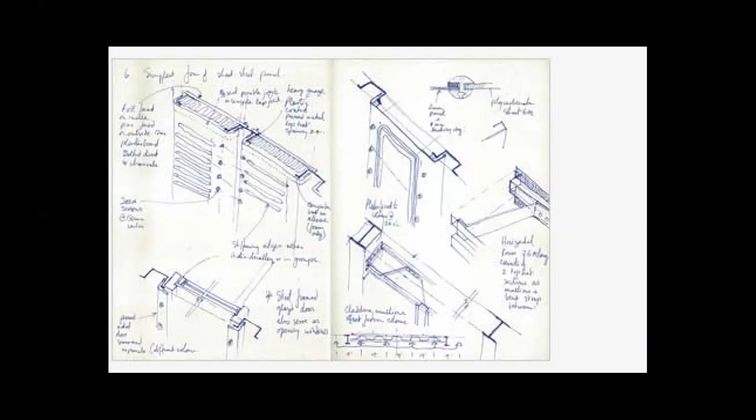Drawings, I always begin with drawings after showing some pictures of the architect. A very minute architect, studying, you see here, details of how the building is built. And this is rather unusual because we see here technical details, drawn in a very sensitive way, I would say.

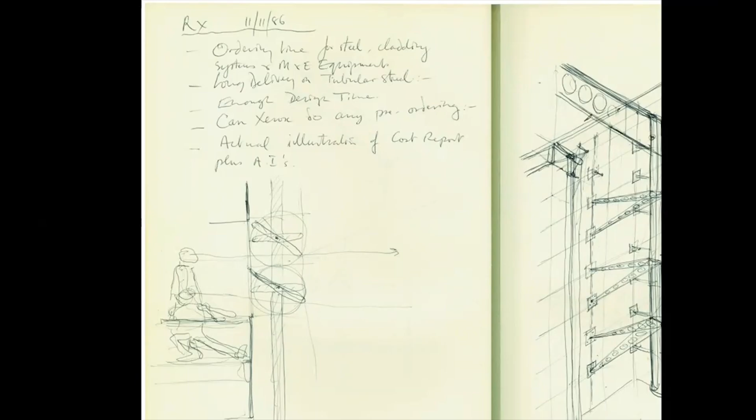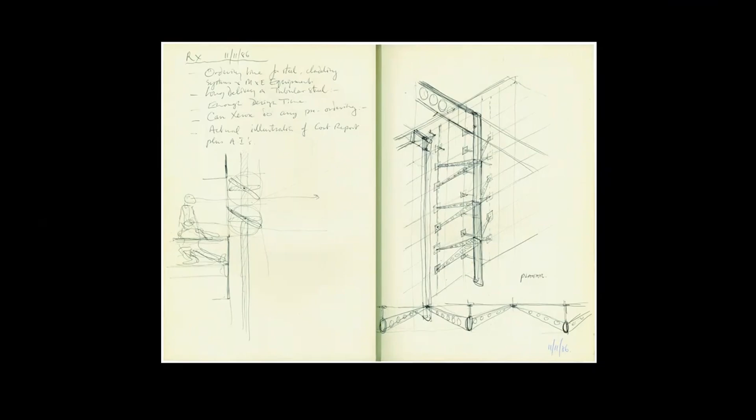So he is an important architect. And I'm surprised that at 80, he gave up his position as the leader and founder of Nicholas Grimshaw and Partners. Anyway, these are his notebooks with studies for the buildings he built. Still drawing manually and drawing very well. Not too many architects of his stature draw something like this, details of this sort. But he did, and I'm glad he did.

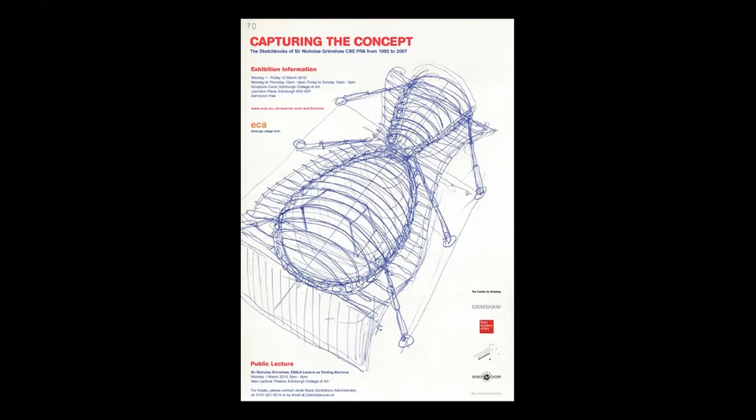Capturing the concept, the sketchbooks of Sir Nicholas Grimshaw. So he was knighted, he received the honor of being called Sir Nicholas Grimshaw, and this is based on his successes as an architect.

Buildings. Okay, so we begin with the BMW headquarters in Bracknell, 1980. But something happened to it. I don't know why I didn't include pictures with this. Maybe I'm a little bit confused. From 1980, there is a reason why I don't have pictures. I made this presentation two years ago.

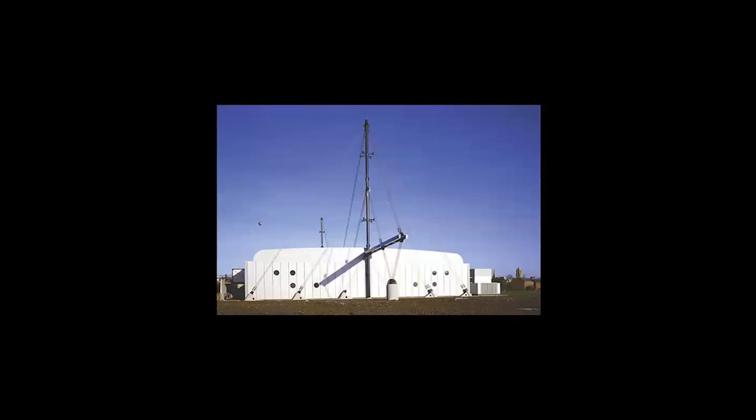We go to the next building, Oxford Ice Rink, from 1984. And look at the elegance of the structure. It's truly very elegant. It's high tech, but somehow the aesthetics are not at all uninteresting. It's like a ship in a way. Technology, if it is used creatively, can also be aesthetically very pleasant, as in this case.

A fine building, which essentially is interesting aesthetically exactly because of the structure. An ice skating rink, you know, you would say what's so special about it, but not too many ice rinks look like this.

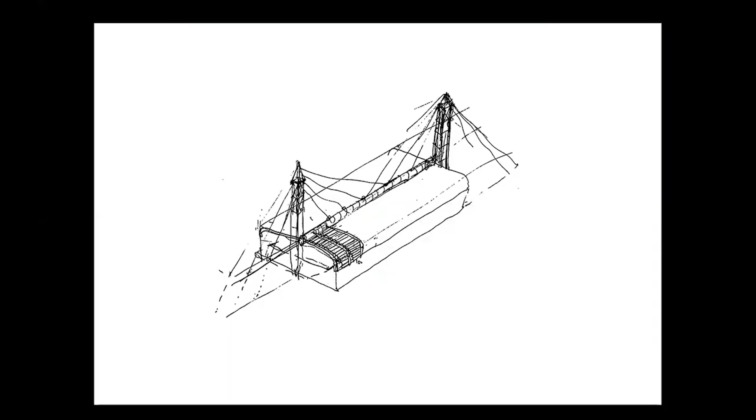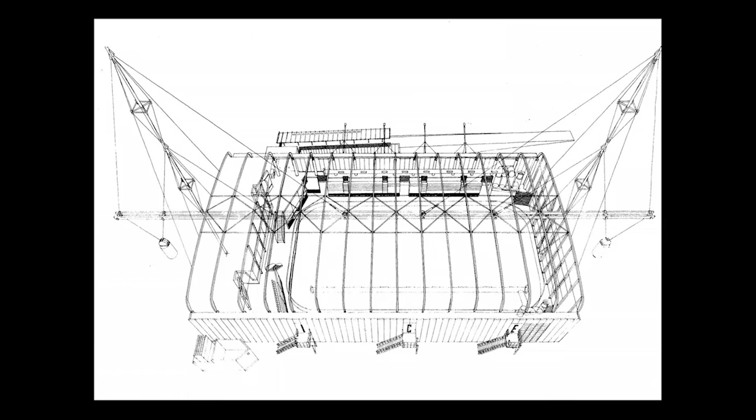His sketch for the building. It is high tech, but somehow I feel it's also very sensitive. And it's because he took the structure, the supporting or the suspending structure, outside of the building. And this creates all of a sudden a visual interest towards the building, facilitating that interest.

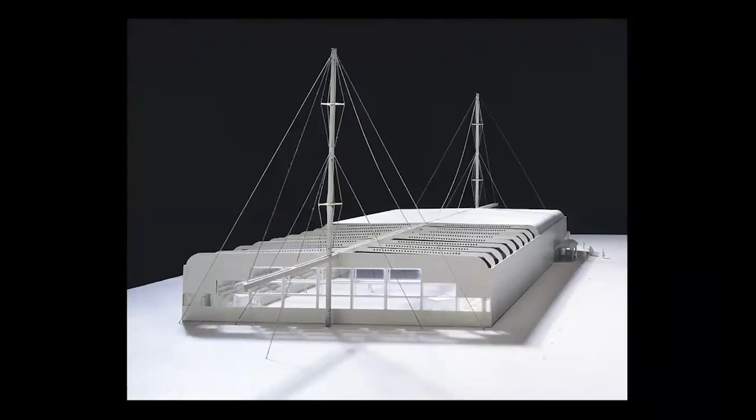Nicholas Grimshaw, the model. Look at the elegance of the structure. It's truly very elegant, and no one can deny its almost artistic beauty. And it's so coherent, and at the same time engaging, interesting. I'm not an engineer, but I feel there is logic here and coherence, and also from an aesthetical point of view, elegance.

Given an isolated site and the challenge of providing a facility for both socializing and sports, the Oxford Ice Rink combines an inspired structural response: two 30-meter tall masts that announce themselves to the historic city center, from where the masts can be glimpsed. With a relatively small budget and difficult ground conditions, as well as the need for a large column-free space for the rink, Grimshaw chose to design a building that could be suspended, thereby reducing the need for piling.

And alleviating the load of the wide span roof. A spine beam formed from two rectangular box sections runs the entire 72 meters length of the building and is supported by the striking pair of masts, which make reference to Oxford's famous spires. The expansive 56 by 26 meter rink is encased by a cladding system that is equally tailored to the building's function. Two-thirds of the rink is clad in cold store panels, with the remaining north facade being fully glazed.

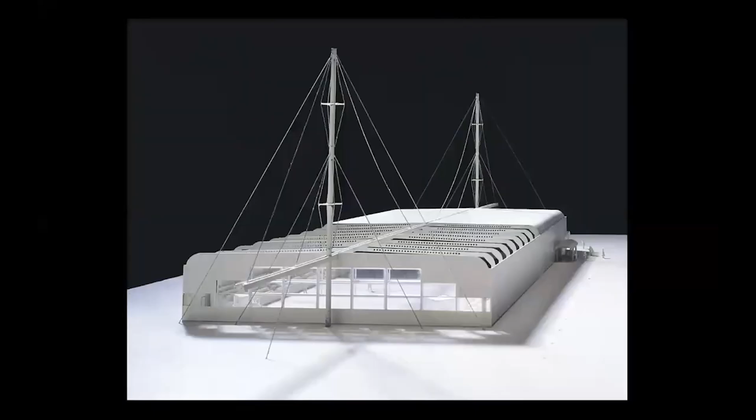Let's go back, because indeed it is very important. You know, the mast is this, and the reference to the Oxford spires, you know, medieval looking. I think it's a very creative way to connect the past with the present. So in this sense, his building is very, very enlightening and enticing. You don't have to mimic the old buildings. You can create something new in the present that still connects somehow with that past.

It's a good building. Okay, now we go to the Clifton Hill Sports Center in Exeter, 1984. Again, I don't have pictures. I don't know what's going on. Financial Times Printworks in London, 1988.

One of the primary environmental strengths of the Eden project is to consider what it replaces. Previously, the site was a China clay pit and was still being excavated during the design phase. The strategy of replacing an almost uninhabitable clay pit with a new natural habitat is perhaps in principle the biggest environmental success of the Eden project. Situated on a 15 hectare landscape, it is an example of successful placemaking.

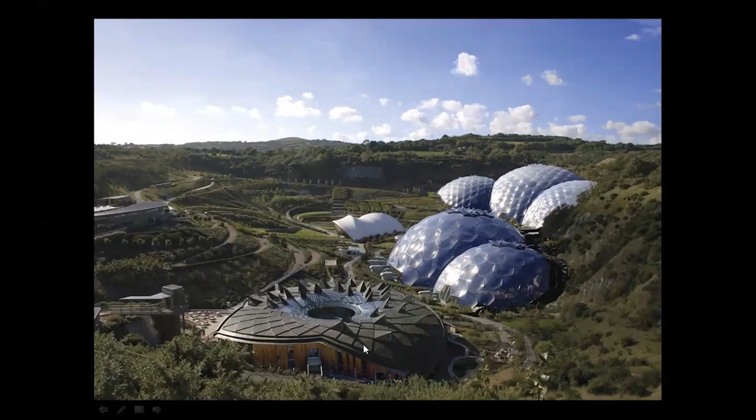Nicholas Grimshaw. So he designed all these buildings, this one included, although it's so very different from the others. He also did the whole master plan. So the whole thing here is done by him and his firm.

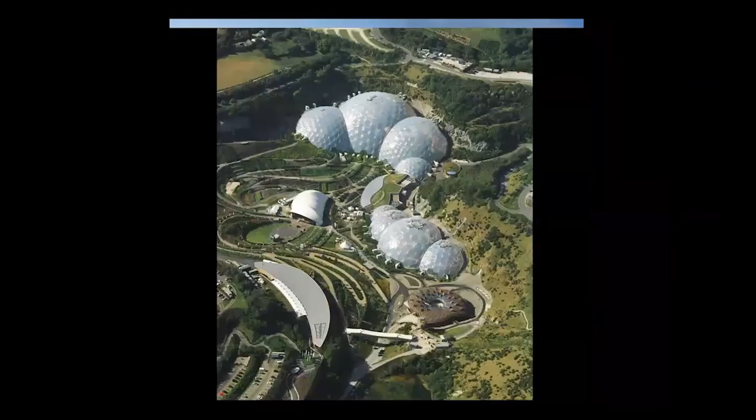In its original iteration, Eden was - you know, the story of Eden is about paradise. Now, if we can create paradise on earth or not, well, it's not so easy, as we know, but anyway, it's called like this - it was proposed as a single interconnected structure situated around the edge of the clay pit.

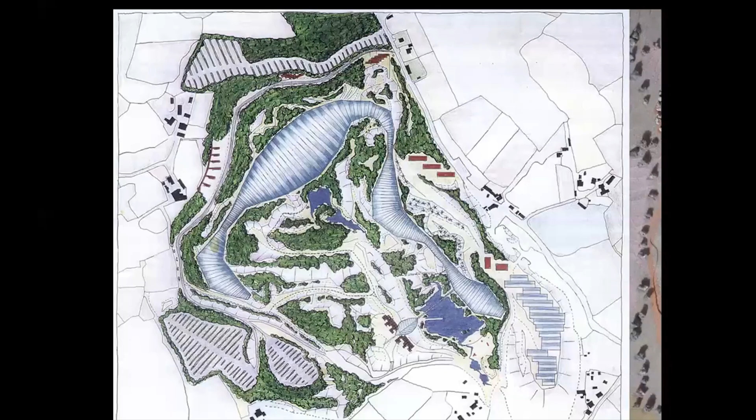This was an initial project, and very interesting, I think, because it's a bioarchitecture in a way. So today the entire site has been transformed from its original brownfield status into an extremely verdant collection of flowers, plants, and fruits, unparalleled in the United Kingdom. The landscaping extends well beyond the greenhouse biomes, making the entire site a lush garden in its own right.

Again, other pictures now from the same project. Designing the biomes was an exercise in efficiency, both of space and material. Structurally, each dome is a hex-tri-hex space frame reliant on 2 layers. The efficiency of the frame relies on the components of the geometric shapes - steel tubes and joints that are light, relatively small, and easily transportable.

The cladding panels are triple-layered pillows of high-performance ETFE foil - I don't know what it is - and environmentally efficient with maximum surface area and minimum perimeter detailing. The biomes received almost 2 million visitors in their first year of opening, and the project is now one of the top 3 charging attractions in the United Kingdom and the second most visited destination outside London.

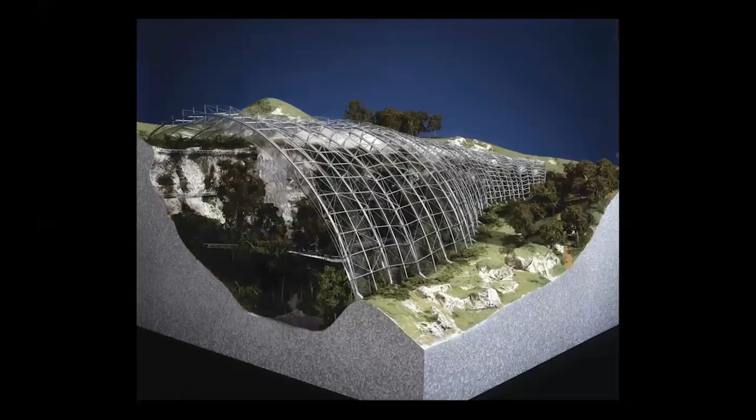But to be honest with you, something bothers me about this project. I understand its benefits for human society, for tourists, for curious people, and so on. But still, somehow, I think it's about the dominance of nature by man, entrapping plants inside this space. To me, it's a little bit questionable, especially these days. Why do we need to do this, for human amusement? I think it's problematic. The human being is still conquering the earth, and thus creating the problems we are confronted with right now.

The plants live there, but they are essentially entrapped in what is more or less some kind of a greenhouse. Why do we need this? Why do we need to put animals in zoos? Does the zoo benefit the animals? I'm not so sure about that.

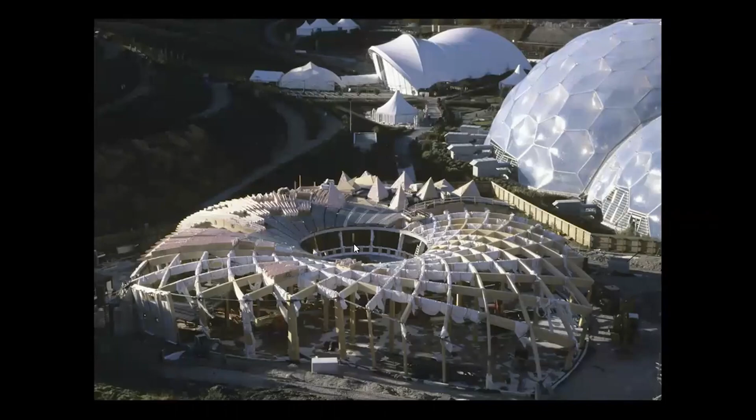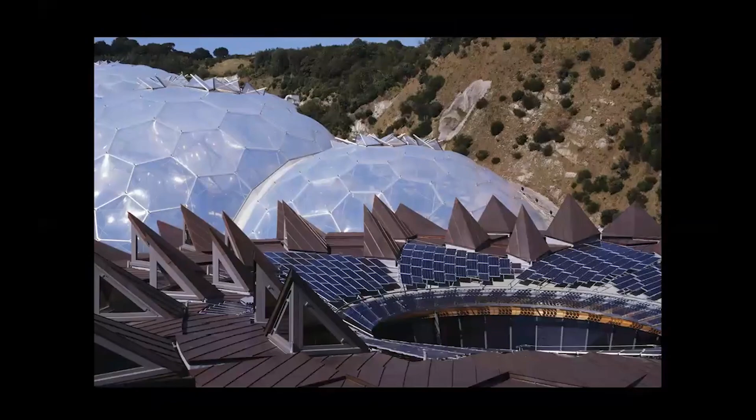So as a counterpoint to the noise and bustle outside, this space provides a quiet, contemplative environment for the appreciation of natural forms. So I think this is the visitor center, and then here you have where the plants are and so on. And we are going to see the sculpture, the seed, by the sculptor as well.

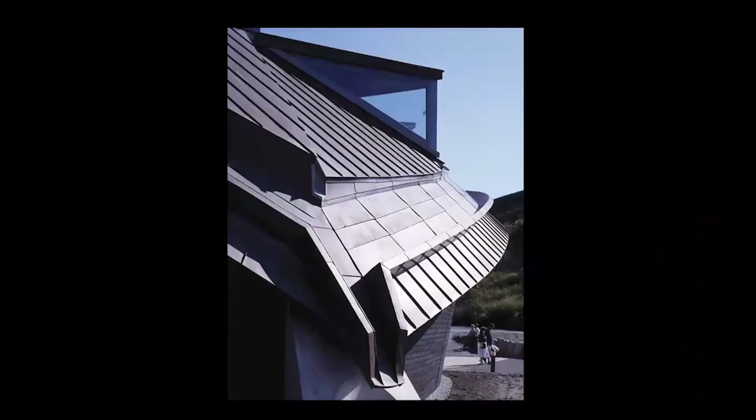It's an interesting architecture, it's not a banal architecture at all. It's high tech, but it's also, because of its plastic verve, interesting, aesthetically speaking.

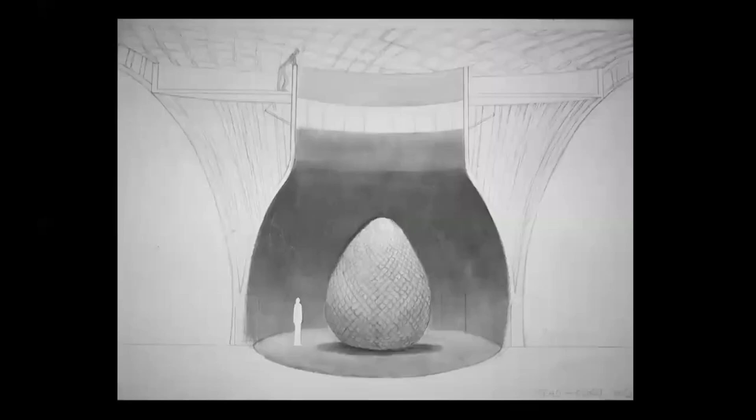This is the sculpture, the seed. And yes, the seed is what Lucian Blaga would call mirabila sămânță. In a way, everything is about the seed, about the beginning. Brâncuși should call it the egg, perhaps. It's all about the same thing, the beginning.

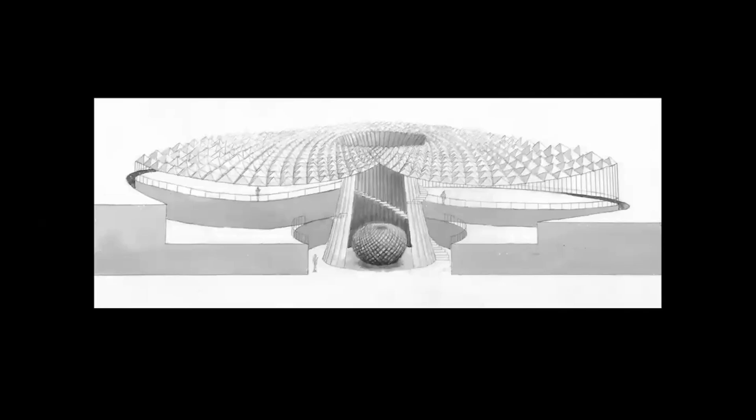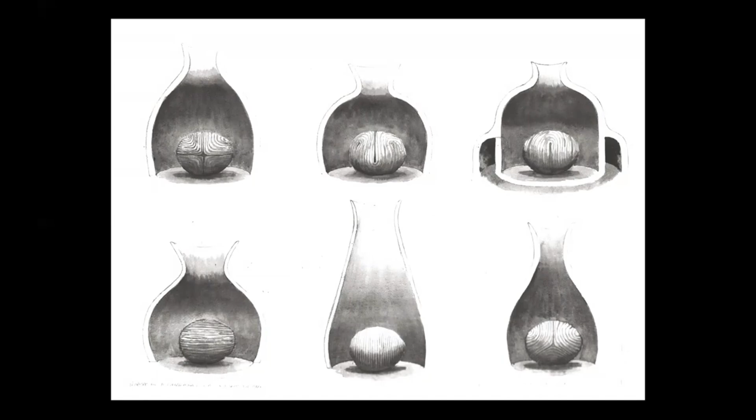So you see, it is a place for science in many ways, but also because of this preoccupation with the symbolism of the seed, its meanings go beyond science. It's about almost mythology, the mythology of life, the biology, even the poetry. It's literally more than just about science and high tech and so on.

And even the roofing makes you think of the sunflower. It's a good building, and it's a good project, and it's a good enterprise. And the fact that it also employed unemployed people is remarkable.

Now, Experimental Media and Performing Arts Center in Troy, the United States. This facility gives Rensselaer—I don't know if I pronounce it well—I suggest to you, the people who are here, check out the projects, because they have an architecture school at this Polytechnic Institute with a name which is a little bit difficult for me to pronounce, Rensselaer. They have an excellent architecture school with very, very innovative projects. Check them out.

Rensselaer Polytechnic Institute, a cutting-edge, immersive performance environment housed in a singular design that conveys the project's substantial contribution to the campus. So Nicholas Grimshaw designed this building for this institute in the state of New York, in the United States.

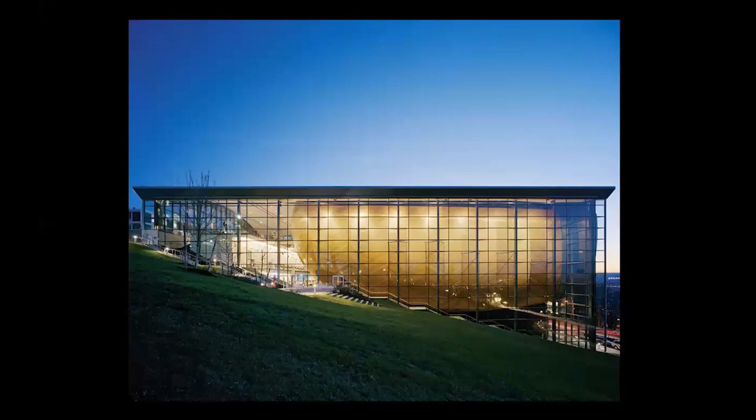Well, for me, this building is rather officious, so to speak. It seems to be almost symmetrical, but there are interesting things inside. It's still a good building, but maybe a little bit too much, for my taste. I wish the curvatures present here would outburst a little bit and not just be flattened by a flat roof. But easy for me to criticize from here—the building was built and apparently it functions well.

And again, please check—I discovered myself 2 years ago 10 projects by students in architecture at this Polytechnic Institute. They were unbelievable, truly unbelievable. Anyway, this is a concert hall, it's not the school itself.

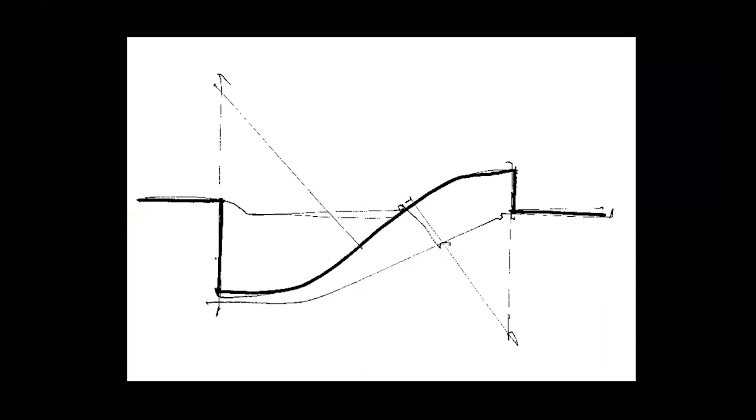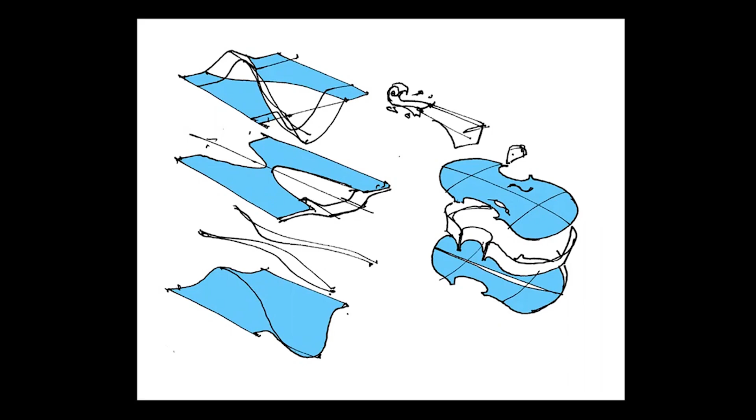So he designed it inspired by the design of a violin. You can actually find inspiration for your projects in anything—you can start from a violin or I don't know what else. But the idea is to abstract, not to become literal, like he did here. The design he arrived at is abstract.

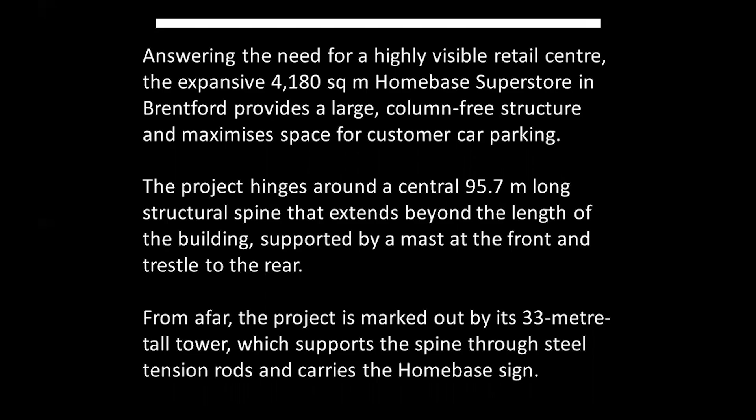Now, a Homebase Superstore in UK, in Brentford, a retail center. I have a lot of text here—usually I don't have so much text. I am uncomfortable reading a lot of text because it could be boring. Better to look at the images and I'll make some comments.

Just like in the first project, the ice skating rink that we saw, he also uses the same kind of suspending structure, which becomes also a sculptural element. Otherwise, the building itself is not really spectacular at all. But because of the structure that suspends the roofing, it's all of a sudden a special building.

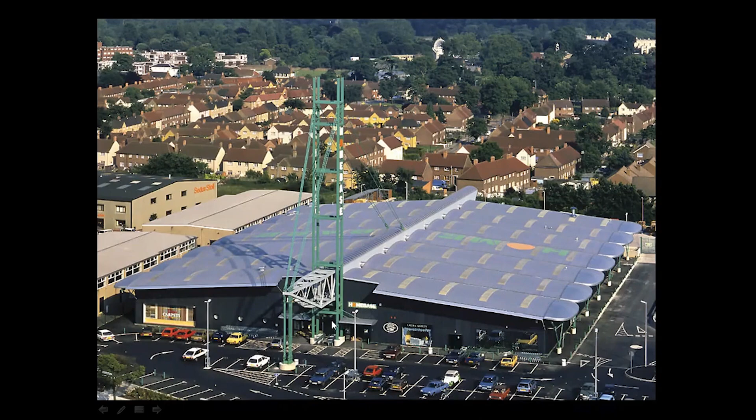It's a store, but architecturally interesting. I'm not so sure about these things on the side, but I guess considering the curvature also of these fragments of the roof, maybe—I don't know. But this is very nice, I think. Just another mast, MAST, like in the case of the ice skating rink. So again, the structure, if it is elegant and refined and innovative, could have aesthetic values truly remarkable.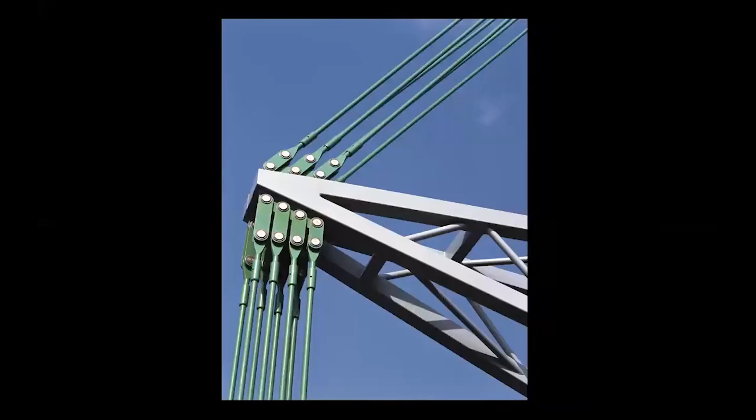I rush a little bit because we still have to look at two other architects, and not unimportant ones. Via Verde, the Greenway in New York—he won the first juried design competition for affordable housing in New York City. The brief called for the ability to replicate the design, sustainable practices, and healthy living principles, in the hope that this scheme can be a model for future developments in the city. So it's a mixed use, mixed income residential development.

So they have units for middle income households and also for low and moderate income rentals. A dynamic garden serves as the organizing element for the community, beginning as a ground level courtyard and then spiraling upwards through a series of programmed south-facing roof gardens, creating a promenade for residents.

Each apartment has two facades, allowing plenty of cross ventilation. I will stress here that it's very important for apartments to have the chance of cross ventilation. This can be done, but you have to quest for it.

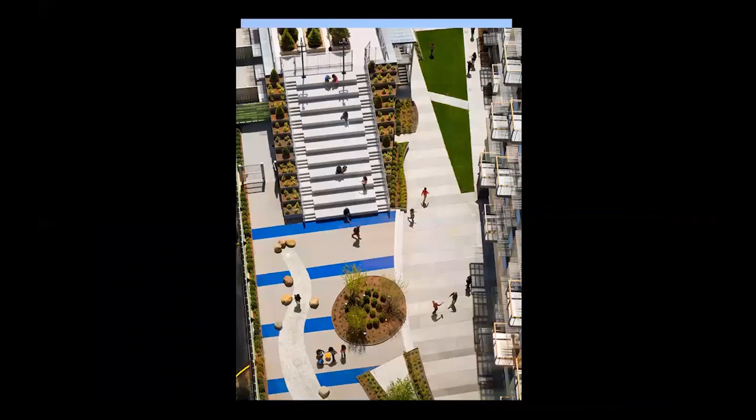I think it's an interesting and viable work. And you have green spaces, you have the blocks of flats, you have the stadium here. It's a combination. It's a hybrid building, and as such, I think it's very appropriate for our time.

And these are not expensive. This is another thing.

Also, color is present, and color should be present. We shouldn't have too much whiteness, whiteness and whiteness. No, and there are also various materials used. So there is a richness, tectonic richness as well.

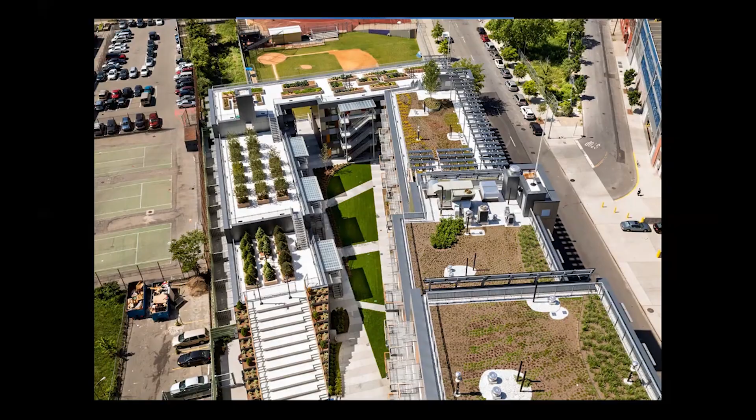Now, Education City tram stops in Doha, Qatar. So he designed the tram station, I don't know if one or several. Grimshaw was engaged by the consortium to design a series of 17 at-grade open-air stops for the system, which were all developed as variations of a single architectural and structural design.

The minimalist design integrates the structure and enclosure in a way that makes them one and the same. Elliptical canopies spanning the tram tracks and sheltering waiting booths and station furniture below. Building services were carefully integrated with the structure in order to support the tram's operation. Very elegant again, mainly because of the innovative use of the structure.

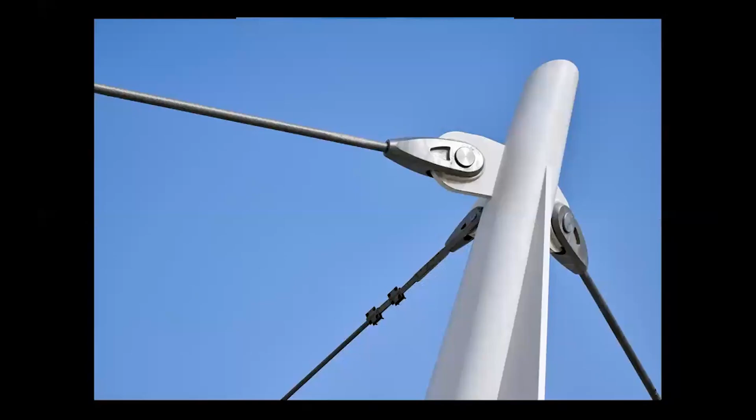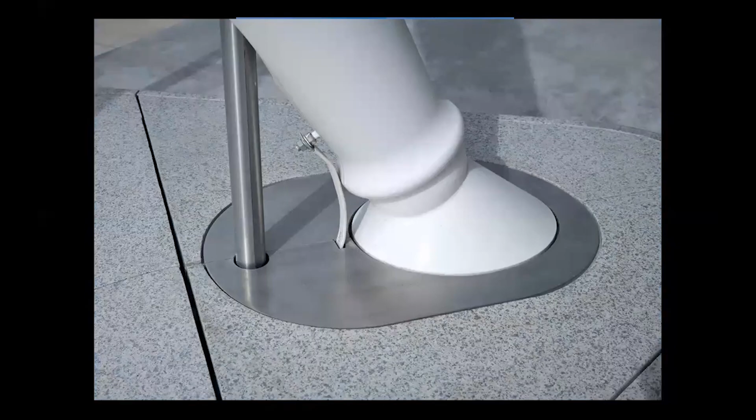As you can see, everything is studied very carefully, every single detail. And this is important. It has been said that in architecture, there are no details in the sense that everything matters. And it's true, everything matters.

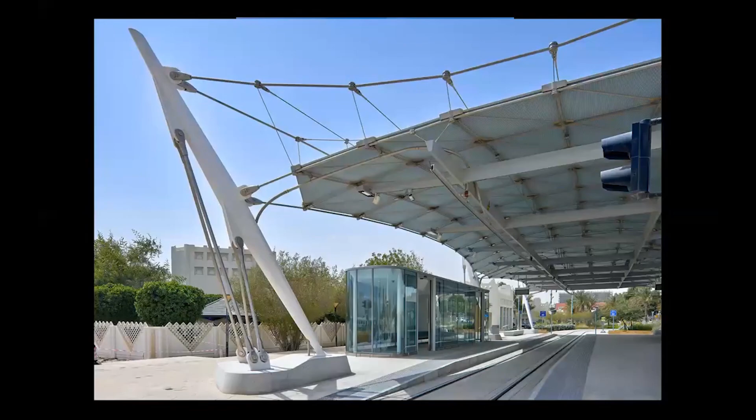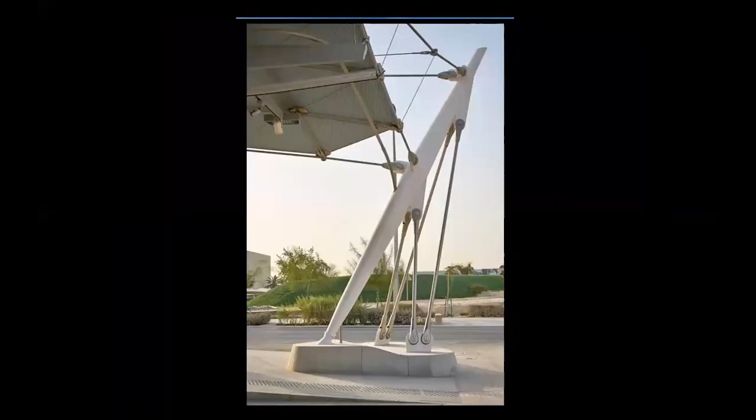You see, a structural element could be sculpturally very interesting. This is actually like an abstract sculpture, but its role is functional. But aesthetically, indeed, it could be seen as a sculpture, and it is.

Now, the Fulton Center in New York City, drawing inspiration from the neighborhood's cast iron buildings and incorporating the restored Corbin building, this extensive complex offers improved accessibility to New York City's storied mass transit system in a durable, elegant setting. The transit hub atrium rises 34 meters and is topped by a conical dome centered on the concourse below.

Here it is. Now, it's a transit hub. It's not a cathedral. It's not a mosque. It's not some kind of a sacred space. It's a transportation hub. I mean, why not? But this kind of architecture somehow makes you wonder.

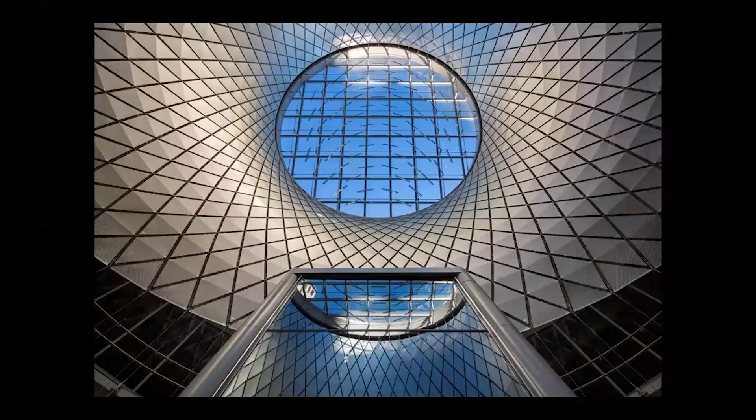It's elegant. It's another elegant building by Nicholas Grimshaw. I don't know very well what to think of this effort to create this centralized space with an almost divine light coming from above in an otherwise highly commercial context.

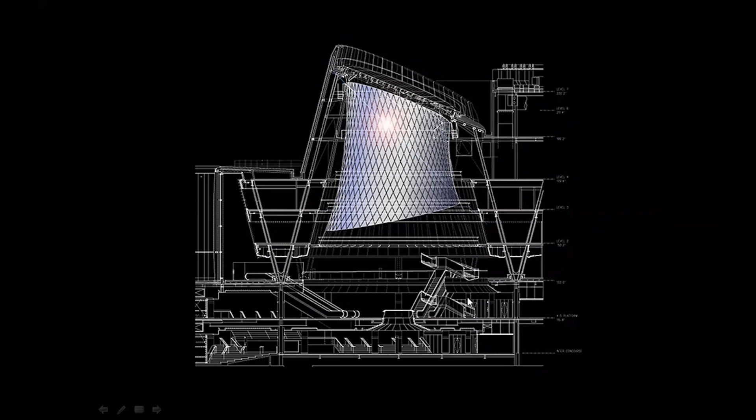It's like making a shopping center, or shopping mall, within a large cathedral, or something a little bit, in my opinion, problematic here. And you can see even in the section, this building, all of it is destined for transportation and shopping and so on. But this thing above belongs to something else. What is it saying? I think it's an effort which is not truly asked for by the functions beneath. But anyway, it was built in this way.

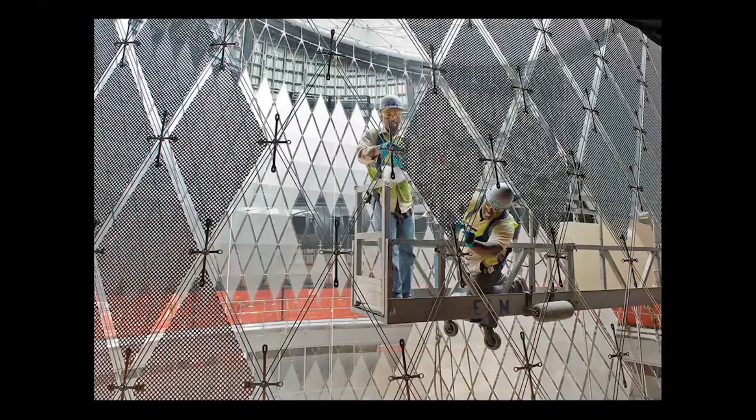And as in the other buildings by Grimshaw, the technological know-how is incredible.

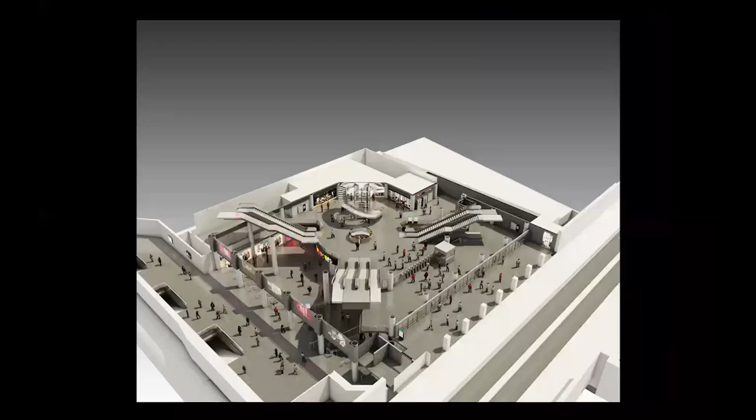Okay, so let's wish him happy birthday.